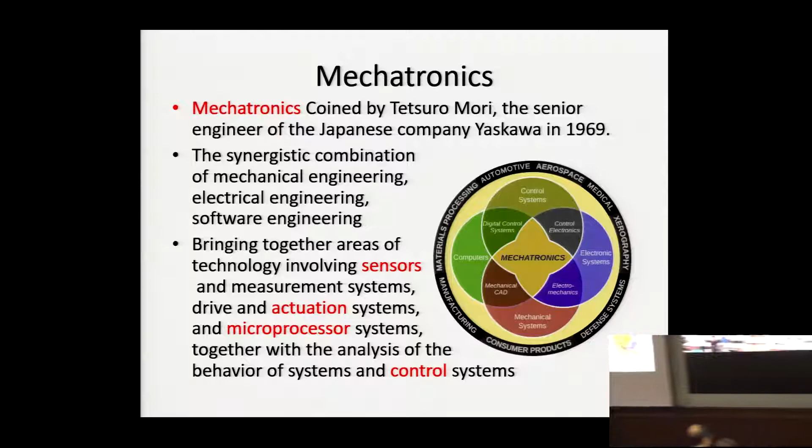And in order to make these two terms work properly, we need another technology, software, to combine these two systems together. So we bring together the areas of technology involving sensors, actuators, and also the microprocessor, together, to analyze the behavior of the mechanical and electrical system. And not only to analyze, but also to control the behavior of the system to meet our requirements. So that's the idea of mechatronics.

So if you look at the figure here, this is mechatronics. It involves the mechanical system and electronic system, and you are going to use computing power, computing technology, to control the system. So this is the main idea of mechatronics. And this can apply to the automotive sector, aerospace, medical, xerography and defense systems, consumer products, manufacturing, and material processing. So we can use mechatronic technology to apply in these areas. I think these days we have to also include agriculture as well.

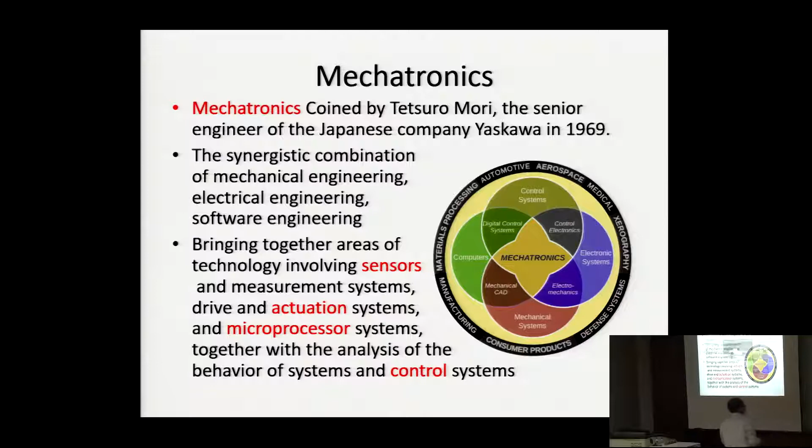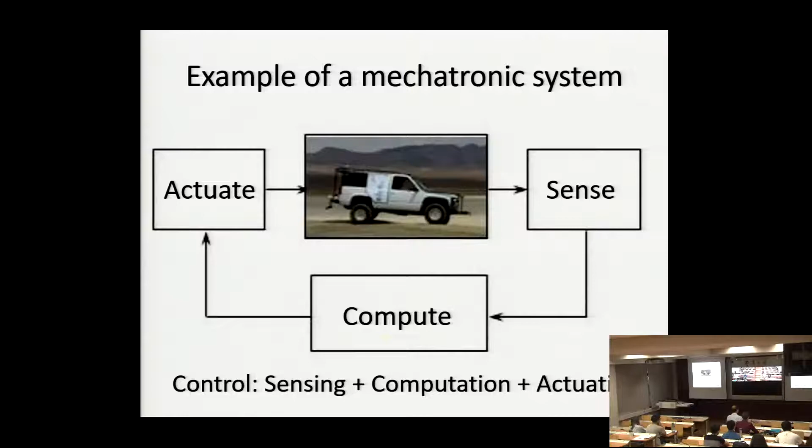I just give you an example of a mechatronic system. So this is the vehicle, and if you want to control the speed of the vehicle, you can look at this object. It is a mechanical system, but it involves a lot of electronics and also a computer inside the vehicle. We want to control the speed of the vehicle, so we need a sensor, and we also need to compute the error between the desired speed and the actual speed, and output the control signal to the actuators, so that the vehicle can perform the desired behavior we wanted. So this is an example of a mechatronic system.

If we look at more detail, this is the vehicle. When it moves, the speed will be sensed, measured by a sensor, and sent to the computer for computation. Then the signal is sent to the throttle for the engine to accelerate or decelerate, so that the speed of the vehicle will follow the speed we set. So this is the kind of workflow for a mechatronic system.

And in this structure, we call it feedback. The term feedback is used because the speed of the vehicle will be measured and sent to the computer, so that we know what's going on with the vehicle. This is the sense of feedback, the core idea of feedback: the speed will be measured and also monitored by the computer so that we can take some actions. In this feedback structure, an accurate speed can be achieved.

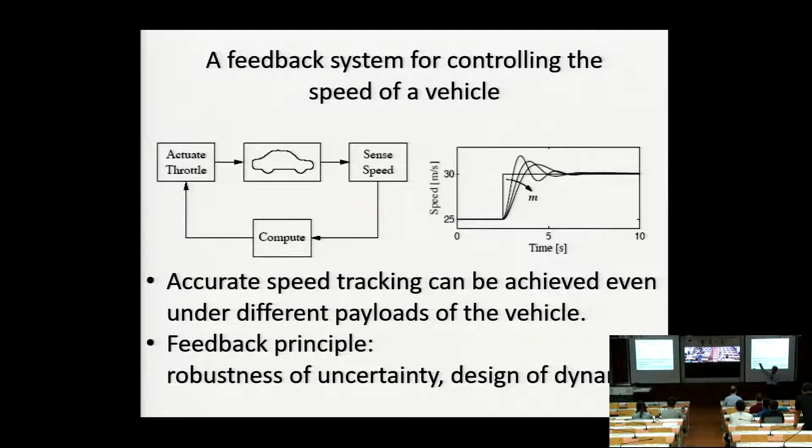Not only in an ideal case, but even under different conditions of the vehicle. For example, if the vehicle is going uphill or downhill, gravity will automatically change the speed of the vehicle. But because there's a feedback, a sensor, and a computer, we can adjust the throttle of the engine in order to maintain a constant speed.

Okay, so that's the concept. Even under different payload conditions of the vehicle, we still can accurately track speed. So using the feedback, we can have two properties. One is robustness to uncertainty. No matter how many people are in the vehicle, uphill, downhill, all kinds of uncertainty, you still can maintain a constant speed for the vehicle. This is the concept of robustness.

Another thing is we can use the feedback to design the dynamics. That means we can use control technology to change the dynamics of the vehicle. For example, if the system response time is too slow and you're not satisfied with the moving speed, you can use the feedback to accelerate. We call it changing the rising time of the response.

This is when you look at some machines, they are moving very slowly. But if you put some sensors and a motor, you can use control technology to increase the positioning performance of the machine. That's what we call the design of the dynamics.

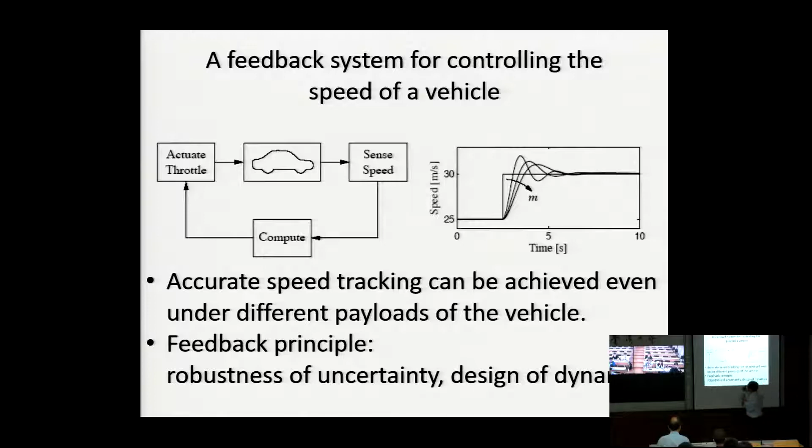And also the overshoot—for example, for luxury cars like BMW, they have actuators on their damping systems. So in different road conditions, they can change the damping factors so that the acceleration after a bump will be very comfortable for the human. That's what we call the overshoot.

So with a feedback system, you can change the response time, you can change the accuracy, you also can change the overshoot, the vibration and acceleration behavior, so that you can use that to design the dynamics of this object. That's some idea for a Mechatronics system.

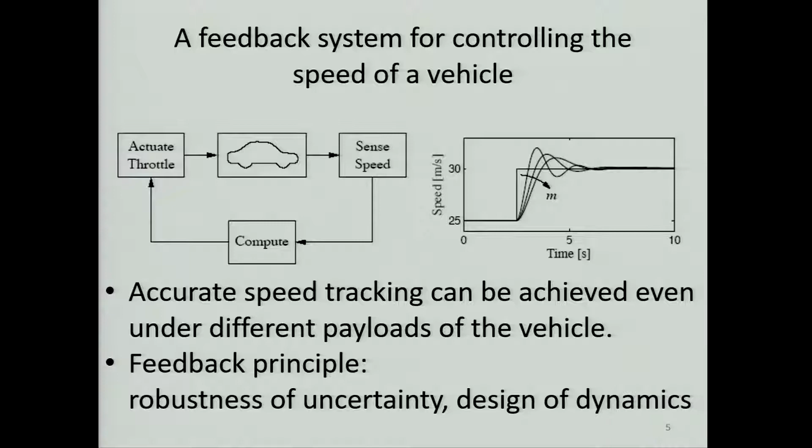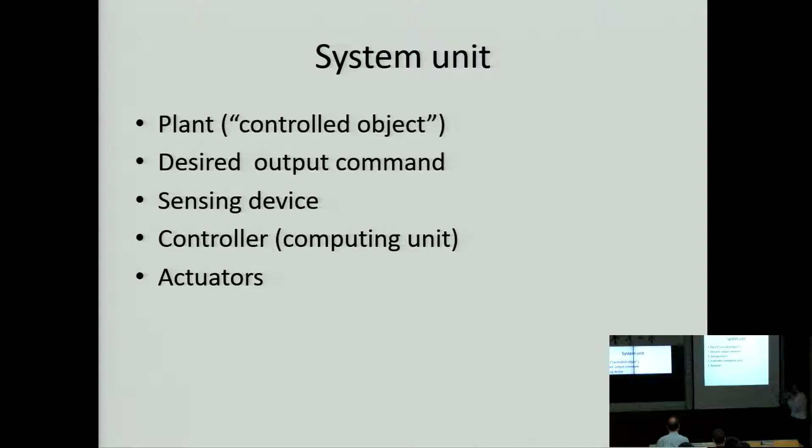So we look at this Mechatronics system, two sides. We have the control object, for example the vehicle, and there's a terminology we call the plant. And then we assign a desired output command to the plant—say, this is our desire, our command.

Then we measure the actual output of the control object. So we have the sensors, and then we have the computers to compute the control signals, and we send the computed signal to the actuators. So these are the 5 elements for a Mechatronics system.

If I speak too fast, please let me know. Later on, we are going to introduce these elements in more detail.

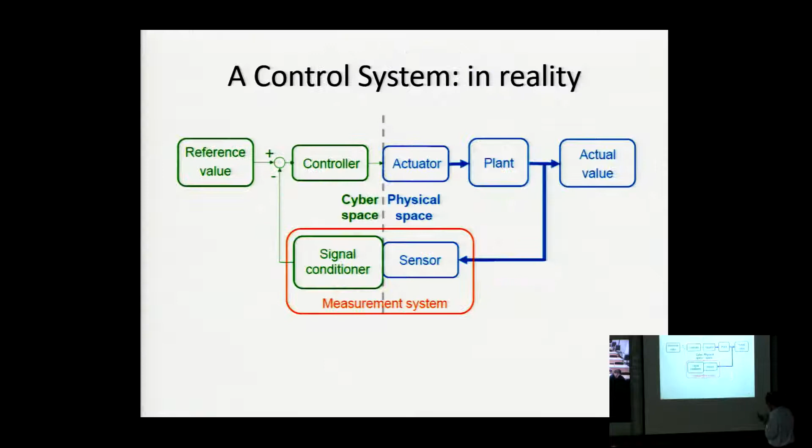As you remember, we need to analyze the behavior of the system. You have to transform a control system in reality into a model, in transfer function. So this mechatronic system will be looked at again, but in mathematics. We need a transfer function to represent the dynamics of the plant, the sensor, and also the controller, so that the overall dynamics will meet your specifications, such as response time, accuracy, and overshoot. This is one of the important procedures when designing a mechatronic system.

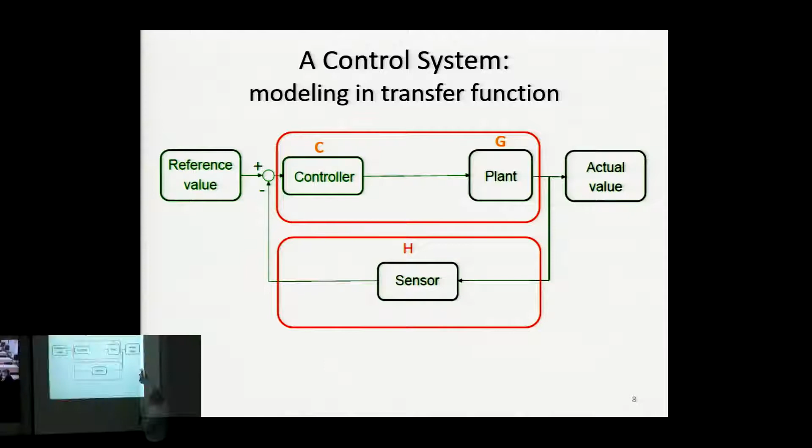In our agriculture field, this is also one of the booming technologies, using this kind of technology for agriculture, harvesting, and many other applications.

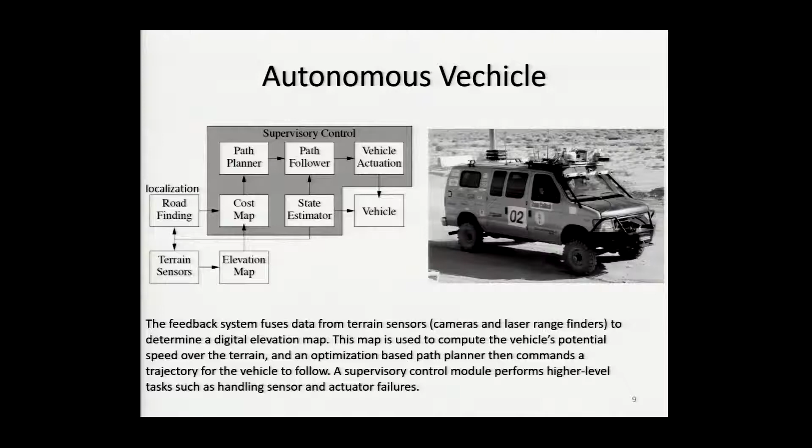From now on, I'm going to introduce each element in this mechatronic system. If you're familiar with it, this is a review; if not, it's the first time you'll get some basic concepts of what's going on in a mechatronic system. First, I'll introduce the sensor, the sensing technology. The sensor may measure physical properties like position, velocity, and acceleration.

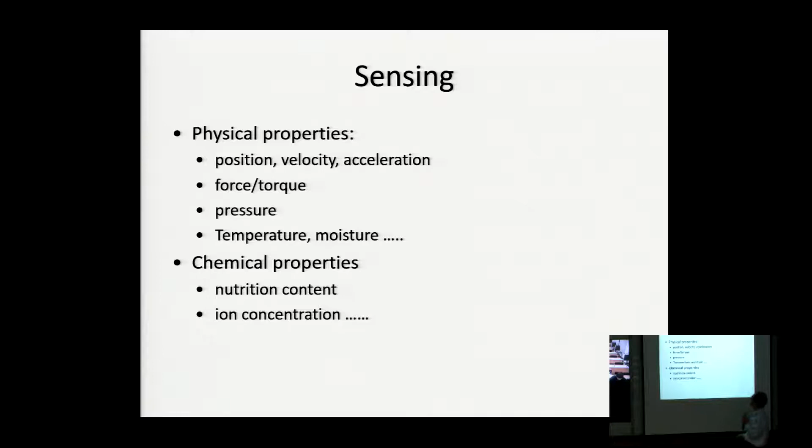The sensor can also measure some force, torque, pressure, temperature, moisture. It can also be used to measure chemical properties such as nutrition contents, ion concentration, and many others, depending on what kind of properties you are interested in. You can find a proper sensor or develop proper sensors for your application.

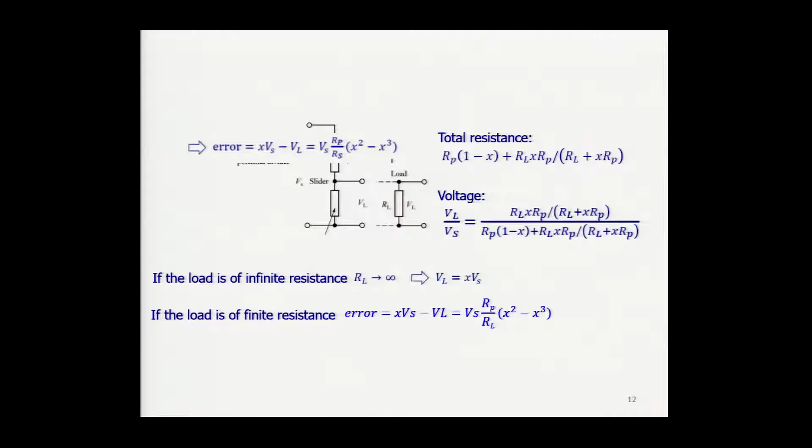And as we see, we have to model this in mathematics. This is one of the very important concepts. When you construct your mechatronic system, always think about whether you can build a model for such a system, because with the mathematics we can start to analyze the behavior of the system. As mentioned in the previous slide, this is crucial for designing your mechatronic system. You should be able to analyze that.

So this is the sensor, the potentiometer, and you connect the output voltage to your device. There's a load effect: if your device's input impedance is infinity, then the relationship between voltage and position is very simple. For example, this is the power supply, which we call Vs. We just calculate the proportion, the ratio of the output voltage to the power supply, and we can know the position, the displacement—this is proportional. For example, if this is 50% of the voltage, then you know the position is in the middle.

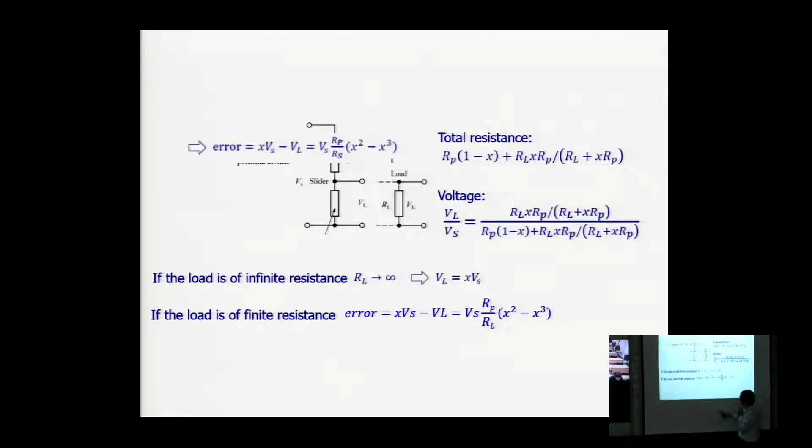That's very important—we call this an analog sensor, because the output is an analog signal, a voltage. And as an analog sensor, it's fragile; it's very sensitive to noise and the environment. In our environment, there are many interferences.

Another type is called the absolute encoder. They will not give you the angular displacement; instead they give you the absolute angle of the shaft relative to the initial position. That's why it's called absolute.

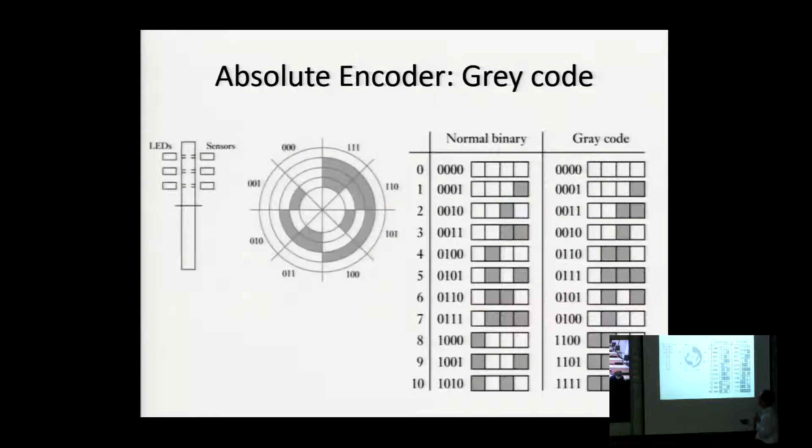It can be made very cheap if the accuracy is not so high. Another type is called the absolute encoder. That's different, it's more expensive. You need more LEDs and sensors to measure that. So, for example, this resolution is 10. Then you have lots of slots, and they are designed very differently from the incremental encoder.

So this is what we call the gray code. The gray code. So they just detect the gray code, and they will know the shaft is in this area or that area. By increasing the resolution, you will be able to measure a very small angle. Okay, let's go gray code.

That's a very brief introduction of how to measure angular or linear displacement. The other thing is to measure the angular velocity, called a gyroscope.

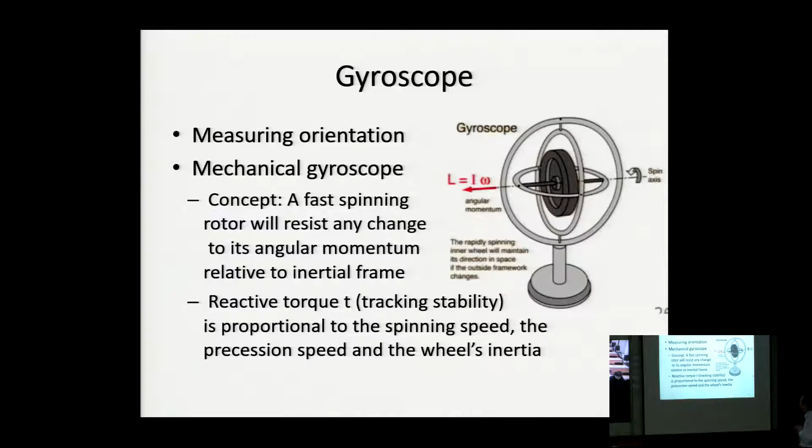In more detail, you have to go to the reference to see what is going on. Okay, that's the basic idea.

We also can use MEMS technology to measure acceleration, called the accelerometer. They use the basic idea of a second order mechanical system, with a mass and a spring. So you measure the pattern, and you will be able to measure the acceleration. This is the basic idea, the standard second order system. So you will be able to measure the external acceleration, and they can make it very small. This is the accelerometer.

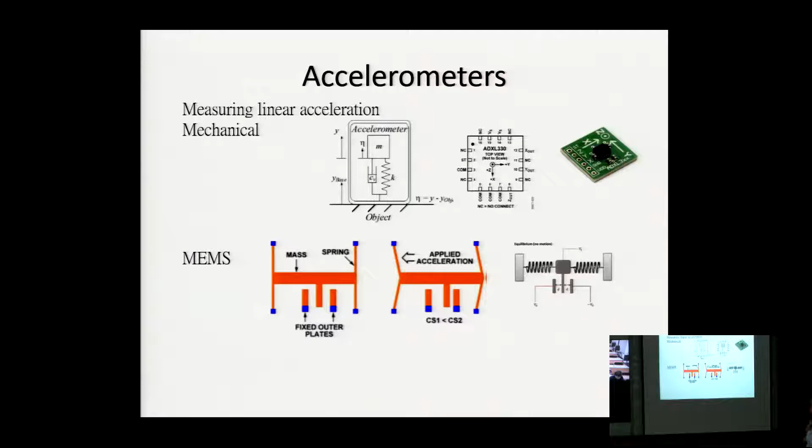And we also can use the magnetic field on Earth to measure the absolute orientation as well. This is mechanical, also using MEMS technology to measure the angle. They're called compass. I think I don't need to talk about compass - when you go hiking, in ancient times, you have the compass to know where you are, right?

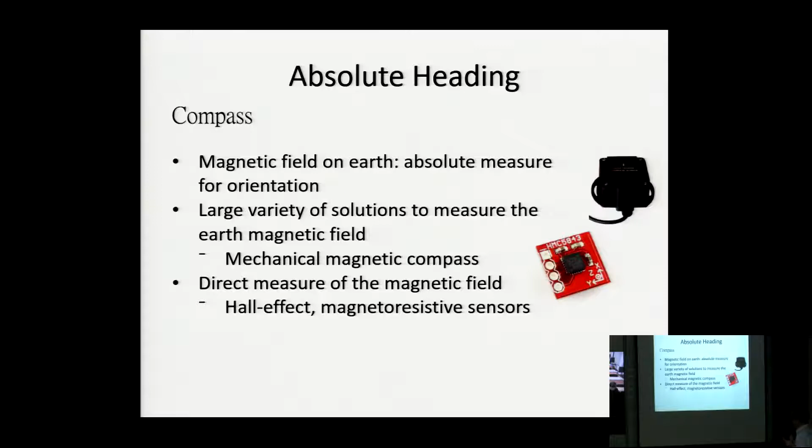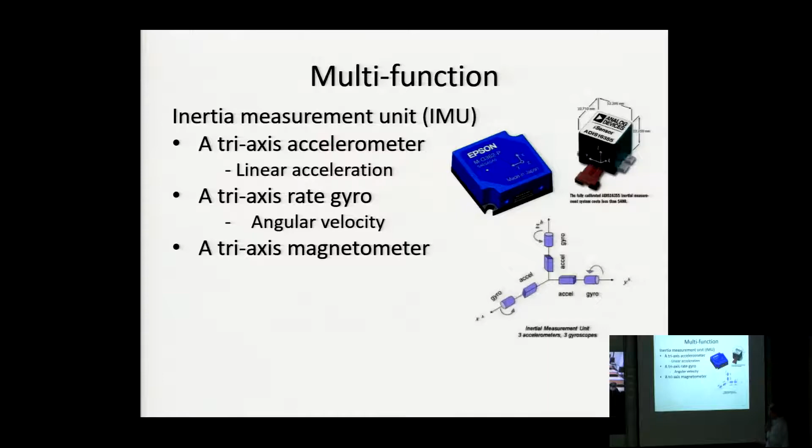The nose, the direction of the nose, that's the idea of the compass. So these days, they combine accelerometer, the rate gyro, and the magnetometers together to provide a unified output. They call it the IMU. At the same time, you can know the acceleration, the velocity, angular velocity, also the orientation relative to the Earth. This just provides you raw data. You need to process the measurement by your algorithms. We call it data fusion. Then you can output the actual position of the vehicle and also the orientation by your algorithm. Okay, right now, this is IMU.

And we also have another sensor to measure the position of your objects. Here in Taiwan, we are using a system called GPS, provided by the US. This system was developed originally for military use, for missile guidance. And nowadays, it's accessible for commercial applications.

And in the system, there are 33 satellites at a height of about 20,000 kilometers, orbiting every 12 hours. Because there are 33 satellites, at the same time your area is probably covered by at least 4 satellites. So you can use these signals provided by 4 satellites and calculate where you are, the position. Of course, more satellites will improve the accuracy of the GPS.

In Europe, you have another system - do you know the name? Japan has their own, and China, Russia too. Every country prefers to have their own satellite system. So that's the GPS, the global positioning system.

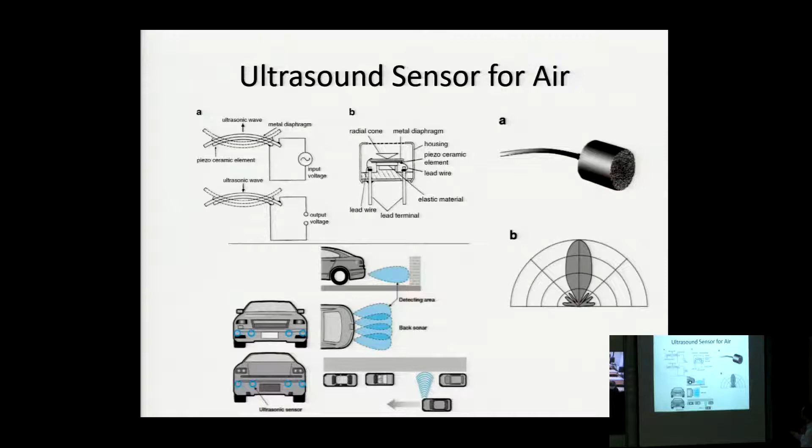So with ultrasound, you send a voltage to the piezoelectric elements - these are the driving signals. They generate a mechanical wave, send it out, and you wait until the echo, measuring the time - we call it the falling edge. You calculate the time duration t, and multiply by the speed of sound, then divide by 2, because the wave goes out and comes back. Dividing by 2 allows you to measure the distance between the obstacle and your object.

But you also have to be aware the speed of sound depends on the medium. For example, if you use ultrasound on the human body, you have to know the speed of sound in your tissue - it's different from in the air, and that will generate a more accurate output.

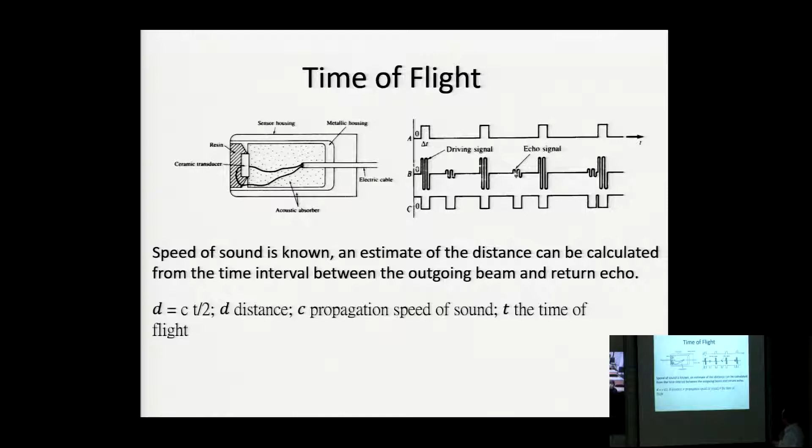But you also have to know that when using ultrasound to detect distance, you must be very aware of the artifacts of ultrasound. For example, if the object is not located in the direction of your mechanical wave, it will create what we call a virtual object. Here, there's a wall with a very smooth surface, so the mechanical wave will reflect at an angle, touch the object, and reflect again. But because you're not aware of this, you'll think the object is in your direction. If you use this distance to move your vehicle, it will collide with the wall. This is called the artifact.

In order to solve this problem, you need more sensors. That's why we usually use many ultrasound sensors - we call it an ultrasound array. Ultrasound is relatively cheap, so you can do that.

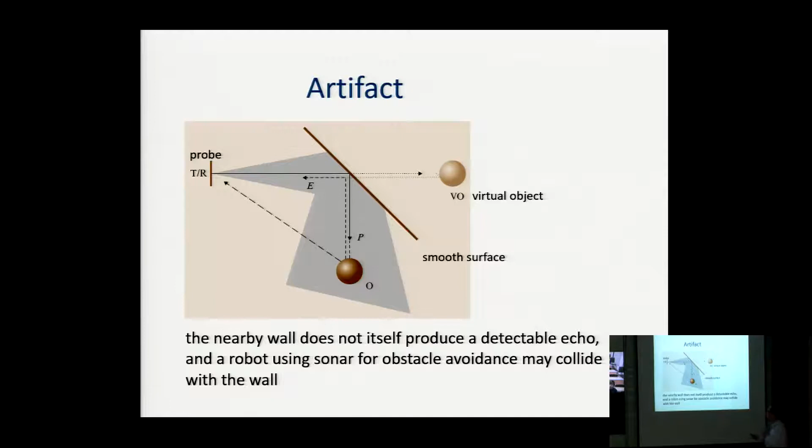And to measure the distance, you can use the ultrasound. You can use another one called radar.

Especially in these days for defense. So this airplane, you have the radar. Radar is a radiant - they are sending out the radio frequency, RF signals.

The radar is moving, rotating, so it detects everywhere. They're sending the signal out, and then they are also waiting for the reflected signals, because in the air there are always lots of reflected RF signals. If you have a sensor, you always have RF signals coming into your sensor.

So they have algorithms here. What they are doing is setting a special modulator. For example, I have a radar here, and I don't want our enemy to know I have a radar. But from the enemy's point of view, they are always trying to figure out, is the radar detecting me? Try to hide myself, right? So you have to modulate your signal, sending it out like noise, so nobody knows if it's noise or a signal sent from the radar.

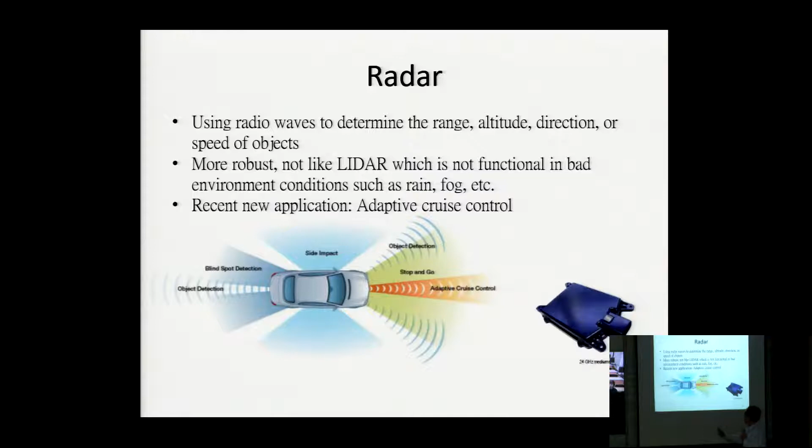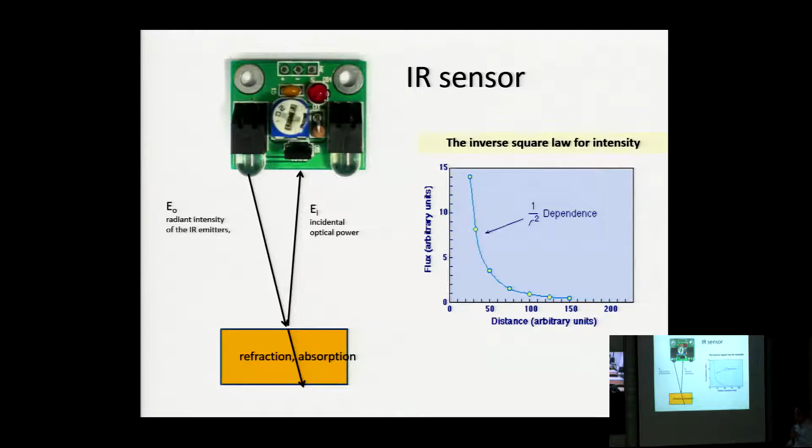And you look at the IR sensor, there are two. Why? Probably you'd say one is enough. If you have more emitters, LEDs, in your IR, you can actually control the direction of your IR light to any direction, using what we call beam forming, using a time sequence.

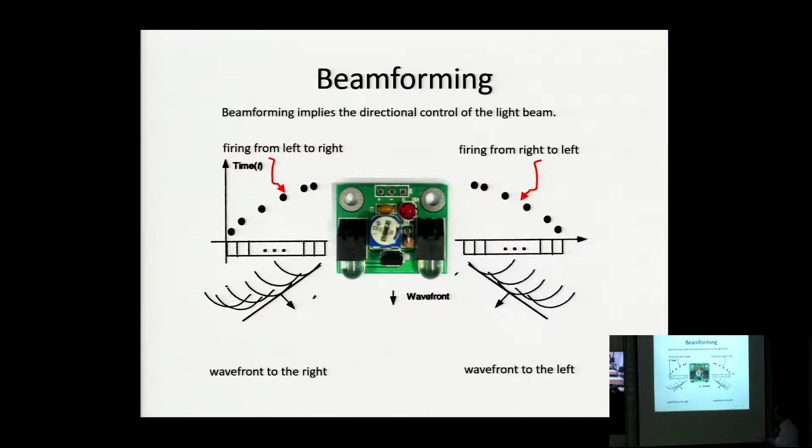So that's the working principle for IR. Very cheap sensor, usually used for line tracking. But these days students more often use the vision sensor. Still, it's very effective for line tracking.

And if you're interested in more accurate position, you can also use what we call the position sensitive detector. They use the same working principle as IR sensing, but in a more complicated way, with better resolution. The working principle is the same, and they make it linear through calibration techniques.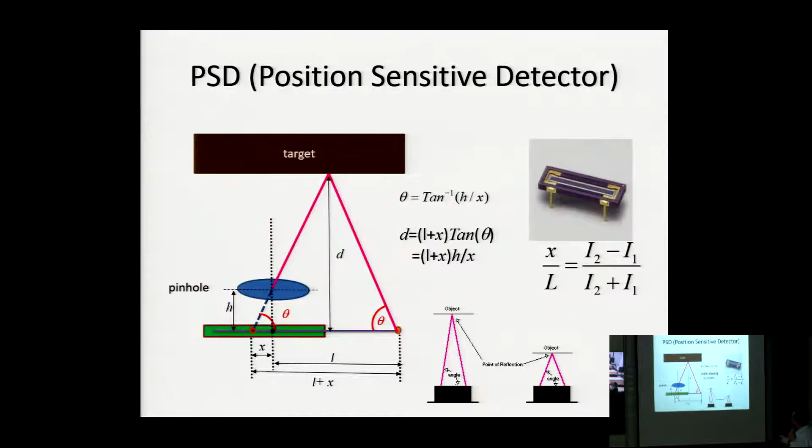Okay, that's one case. I'm going to introduce a lot of sensors because this is very important for you to make an electronic system. This is the laser rangefinder - it's only one direction. They send out the laser light, detect the reflected light, and calculate the phase shift.

You cannot measure the time of flight because the speed of light is very, very fast - measuring that is impossible. So one thing you can measure is the phase, because a laser is an electromagnetic signal that has a frequency. By measuring the phase, you're able to calculate the distance. That's for one direction.

These days there are two directions - they rotate the laser rangefinder so they can measure the environment in 360 degrees, creating a point cloud. And if they angle it up and down, they can generate a 3D point cloud of your environment. That's called LiDAR.

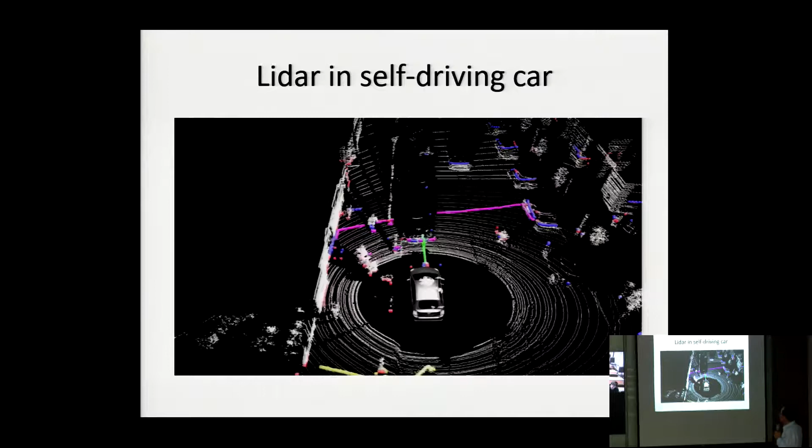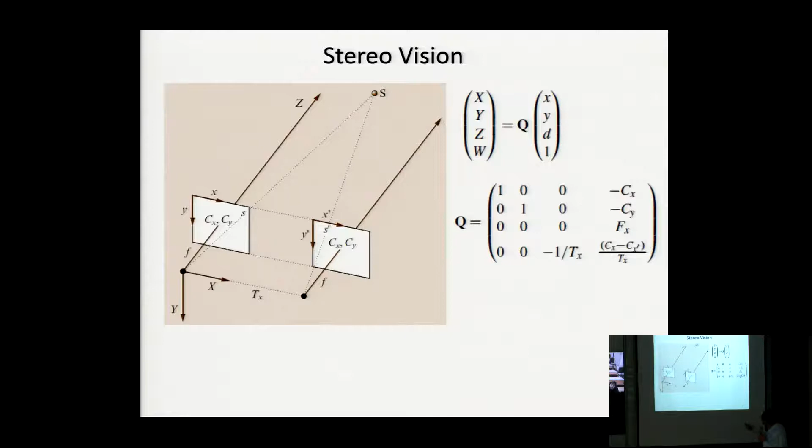And this is the last one, also very important - the vision, stereo vision sensor. They use two cameras to take images. If you have the model, you'll be able to calculate the object's location from these two images based on your model. I'm not going to explain in detail how it works, but I want to point out that when you use stereo vision, you have to know its limitation.

It's called disparity. For example, if you have two eyes - left and right - and you close one eye and go to an area, you won't get a very accurate estimation of the depth of the object. But with two eyes, the image on the left-hand side and the right-hand side are not completely the same - they have a little difference. We call this disparity, and using this disparity with a model, we can calculate the depth of the objects. That's the working principle.

But if we look at the stereo vision system... well, this is very, very complicated. We simplify these two nonlinear matrices. We can see from these equations that they are inversely proportional to each other. We calculate the sensitivity of these equations, and we find that the sensitivity of depth is the inverse of disparity squared.

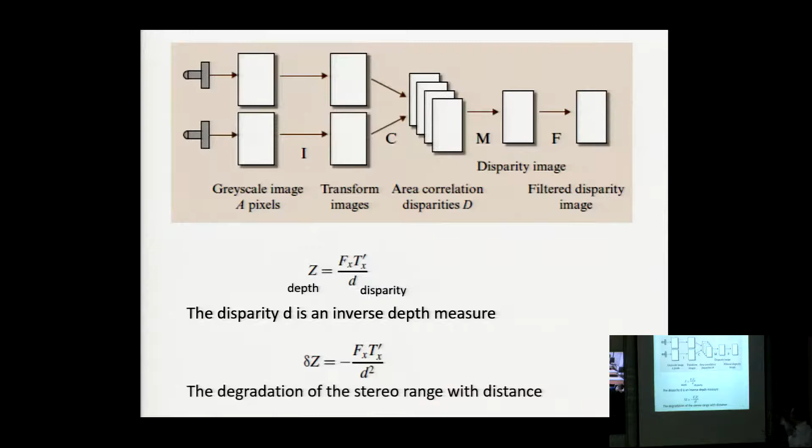And if this sensor can be very, very long distance from each other, they make the resolution much better. This is a physical property of that, okay, so you know that.

So in order to do that, you have to analyze your stereo vision system to think about your disparity and make your model in the area you are really interested in, right? So that you can make your stereo vision system more accurate. That's one thing you have to bear in mind when you are using a stereo vision for the distance measurement.

Oh, we are running out of time. So originally, I was planning to have a short break, but I think I had better continue my presentation.

So let's give you a lot of introduction, many different sensors. I think it's quite important when you are making a mechatronic system for agricultural application.

And then we look at the actuators. I'm going to make it short. So here, there are 4 types of motors, probably quite frequently used in industry. One is a DC motor, DC brush - there's a brush here, this DC brush motor. And also one of the very important, we call the brushless DC motor, especially for the vehicle, electric car, and stepping motor. And in industry, we need a large torque and energy efficiency, so because their power is mostly in AC, it's AC motor. So 4 types of motors.

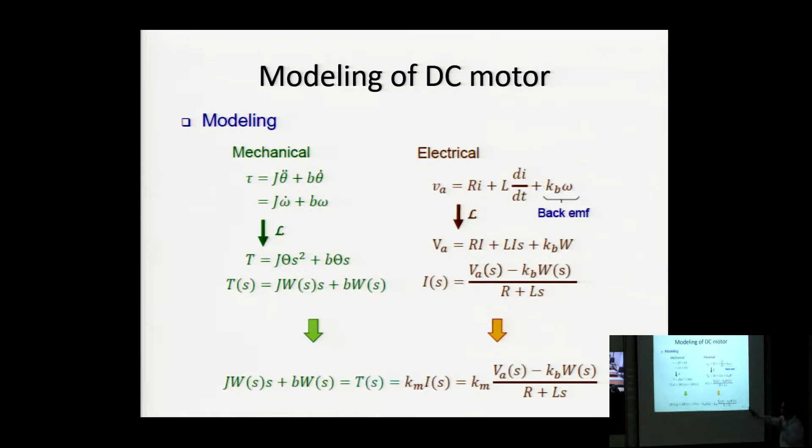You have a motor constant, you have a KB here, back EMF is also another very important factor. And then the armature resistance, inductance, and also have the moment inertia of your shaft and the bearing friction. These parameters will strongly influence the dynamics of your motor, as I mentioned.

But you can use control to design the dynamics of your motor, as I mentioned. So in these days, they have a controller we call driver. For the motor, we call it servo motor. The purpose of the servo motor is to design the dynamics of the motor to meet the requirement by the users, right? So this is only the motor.

If you combine with a sensor, like an encoder we just mentioned, the computer, and also the power electronics, then you can make your DC motor as a servo motor. And then you can improve the response time, the accuracy, and also the overshoot. So that's the basic.

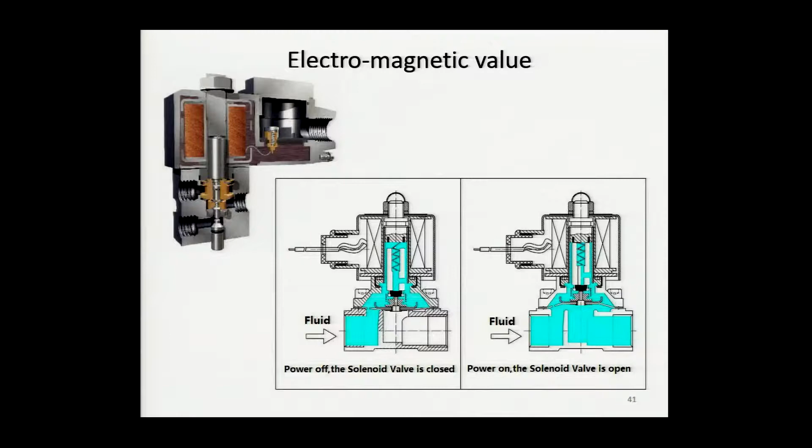So, sensors, actuators. What about the controller? Here, I just give you a very short introduction of the controller.

For example, students making the robot move from A to B. They calculate the distance is positive, so they move the vehicle towards the goal. When they reach the goal and overshoot it, they turn it back. So if using on-off control, the vehicle is moving back and forward, like oscillation. On-off control will produce very significant oscillation when you reach the area of the goal.

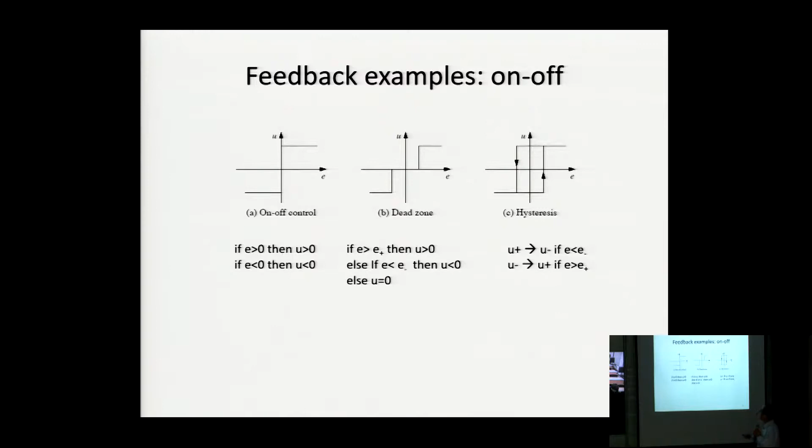There is also another on-off control, but in a more sophisticated way. If the load is a little bit up or down, then you probably need to make your program more complicated, depending on the direction — hysteresis control. All these are categorized as on-off control. You don't need to know any model of your control object, the plant. Depending on the current sensing information, you decide the output. I think it's not good enough, the performance is not good enough.

So another is using what we call PID. You can see the control signal is continuous signals. It's more sophisticated, based on the error to determine the output. So error is larger, then the control signal is larger. So you can see the car, when away from your goal, is moving faster, but then as it reaches the goal, they slow down the speed. Finally they will stop at the goal. That's the idea of proportional feedback control.

But unfortunately, many systems, if you use only proportional control, they will oscillate, but eventually they will slow down. As we see, using proportional control, you can improve the response time, because if you are using on-off, you're moving at constant speed. But if you are using proportional control, when they are very far from each other, they move very fast and then slow down. So ideally that will improve the response time, make your system react more quickly. But unfortunately, some systems will overshoot a little bit, because if you increase the gain, it's going to overshoot.

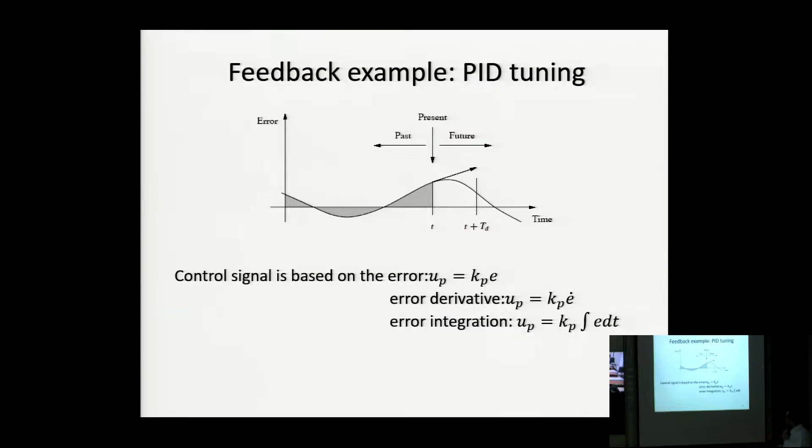So why do we need a model-based controller? Why do we need to learn a lot of theory to build a model for controller design? Why can't we just use PID? I'll give you an example.

In the next 10 minutes, this is the autonomous vehicle in an orchard developed by Carnegie Mellon University for localization and control, from this journal, Computers and Electronics in Agriculture. This is the autonomous vehicle in the orchard. Here you can see the LiDAR, as we mentioned. In this paper, they use LiDAR to measure distance and for localization and distance from landmarks.

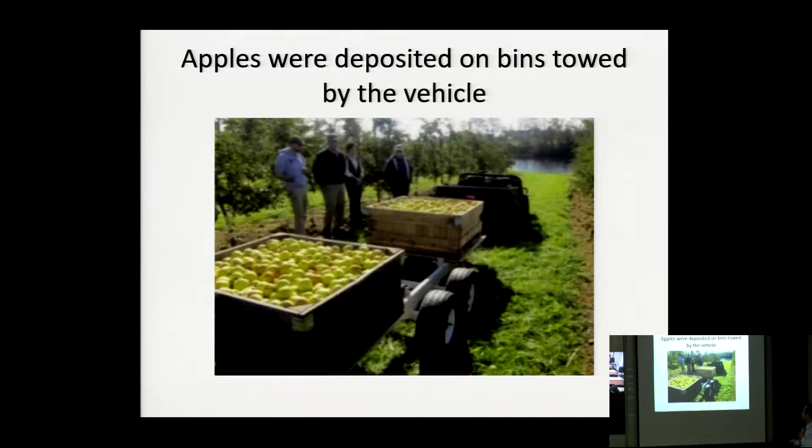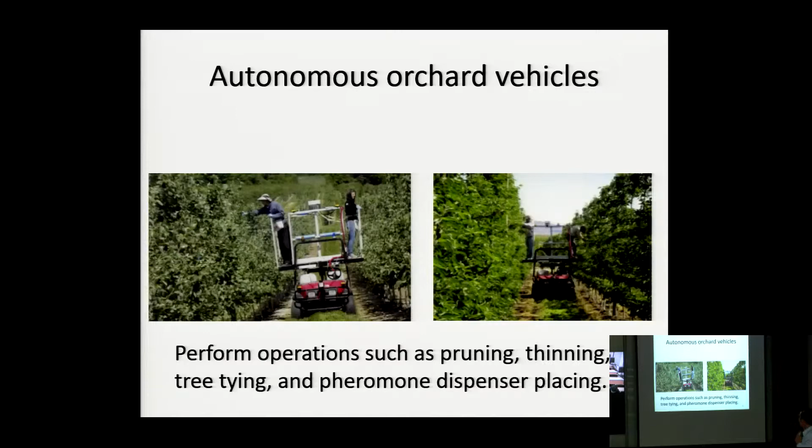They have many applications - they can do harvesting, pruning, thinning, and many other applications. So they need a model. What kind of model? They built a kinematic model for the autonomous vehicle. They are not going to control the dynamics of the car, just the kinematics. So it's not very complicated, but it will improve the overall performance, as we will see in the results. So this is the car.

I think this is rear wheel drive, but there's a steering wheel here. This is the steering angle, all right? And they model this as a bicycle model. The rear wheel provides the speed, and the steering wheel provides the steering angle. So there are two parameters - this is the speed of the vehicle. First of all, you have to find physical variables to describe the behavior of the system.

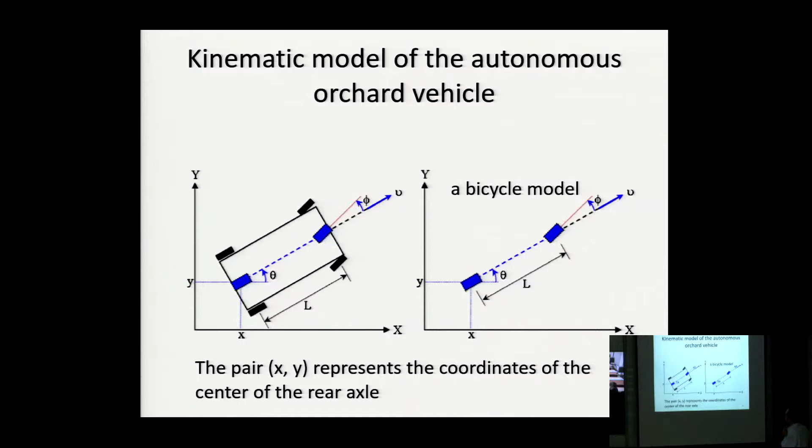So this is how they use mathematics to describe the behavior of the system. Finally, they derive the equations for the kinematics of the vehicle. I'm not going to explain the equations - that's not the purpose right now.

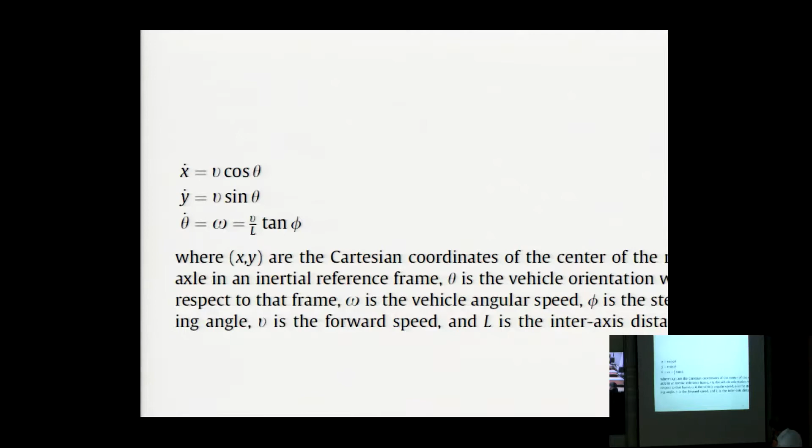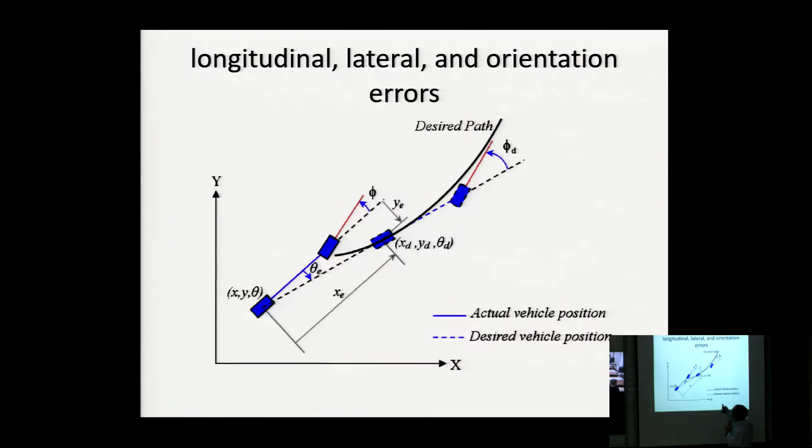So with this model, if your desired path - as in path planning - requires your vehicle to move along this curve, that's the path planning. Then how does your controller have to act for that purpose? It depends on the measurement - the sensing, the LiDAR, the measurement.

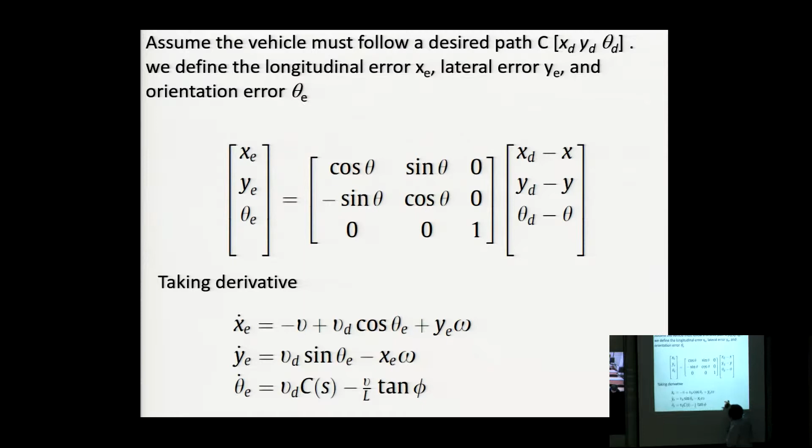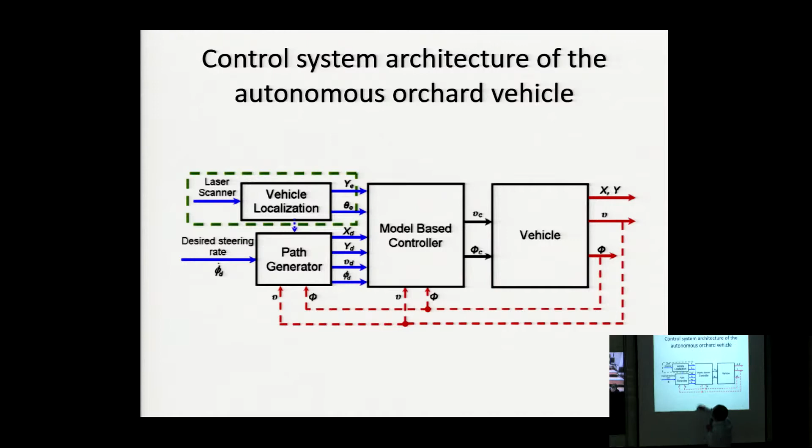So we call this a model-based controller because you already have the model. You calculate the rear wheel speed and the steering angle - these are the control signals. Based on the sensing, you have a sensor, the laser rangefinder, and you also generate the path. This is the model you calculate, and then you can do that.

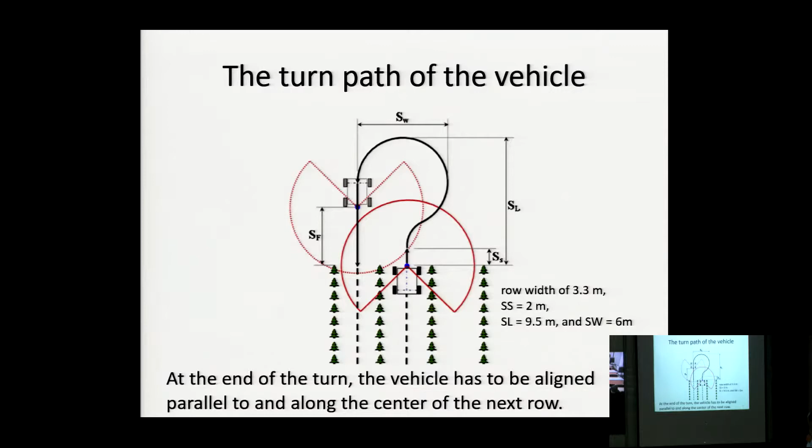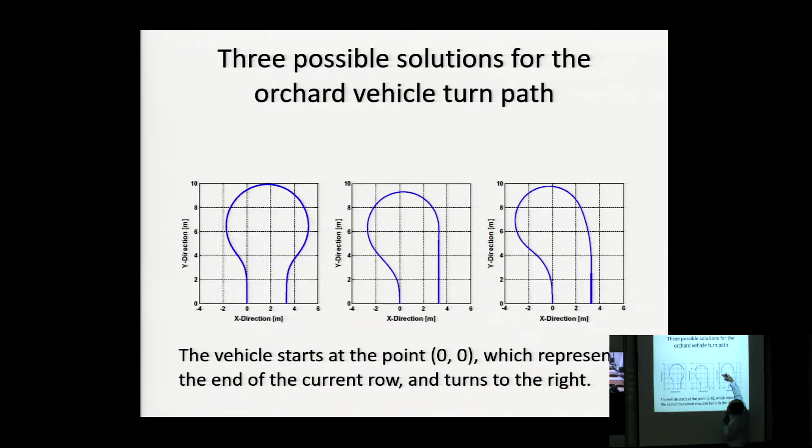So we will see the video - they are doing this based on the model. They have many different schemes for how to turn the vehicle in the opposite direction. They also do path planning - this is what we call path planning, and this is trajectory planning. This is the path, and at each point, what speed it's going to be.

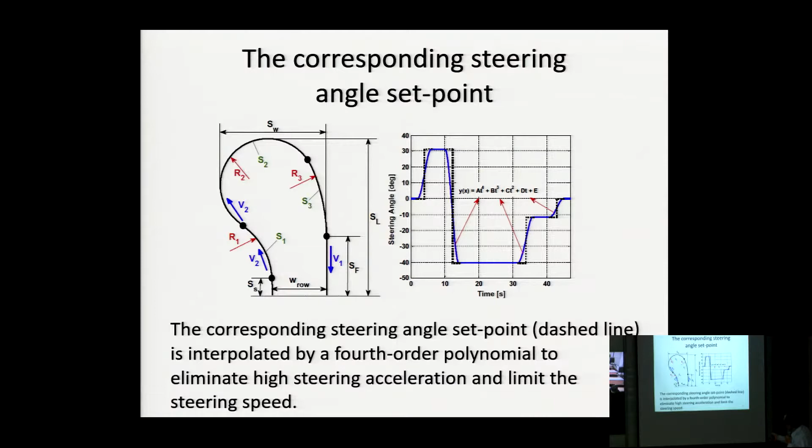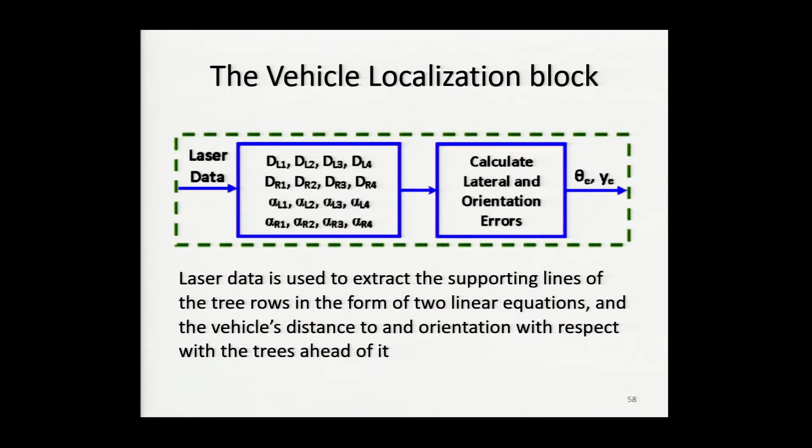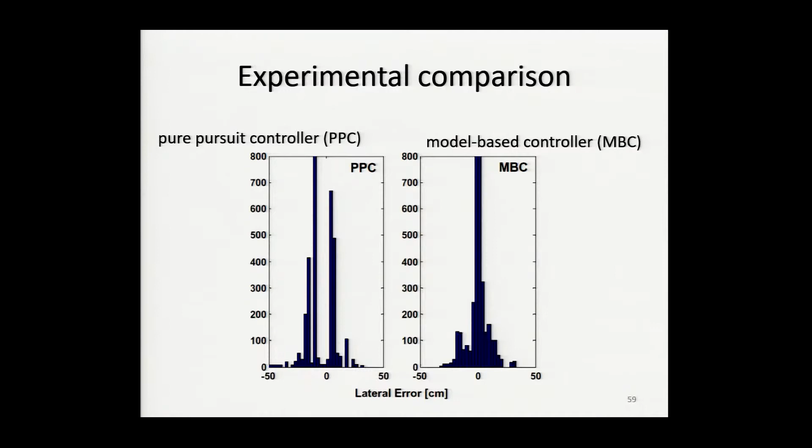This is the localization, how they calculate the position. This is the performance - this is the model-based controller. You can see that if you're not using the model, it's less concentrated around zero error in the center. That means the average error for the model-based controller is much better than without the model. The blue line indicates that your vehicle will follow the planned path, staying on the right track to do the job, something like that.

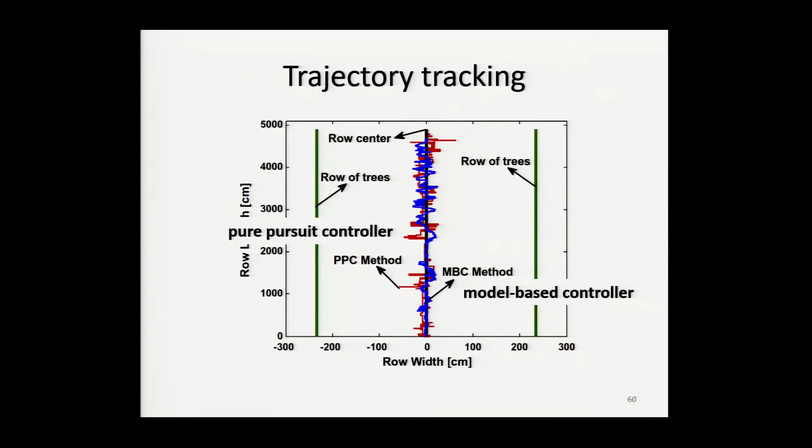Let me show you the video, and then we can discuss. That will be today's video. This is even more complicated because there's a trailer involved.

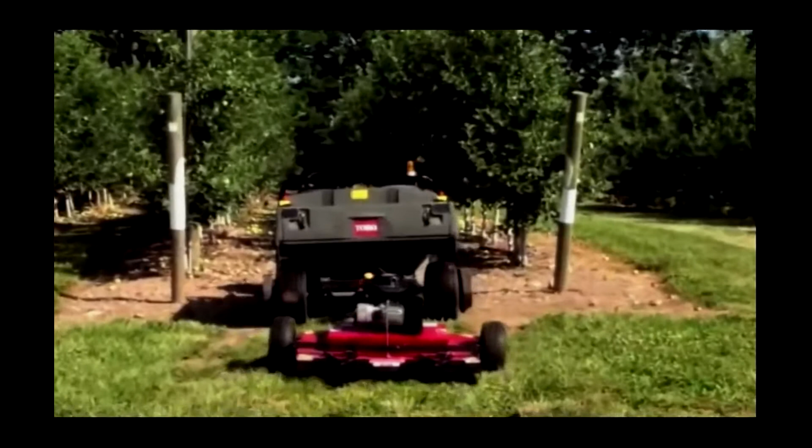This is not easy, right? I think my students will know, because there's no marker at all in the turning area. When they enter into the row, they have a sensor input, that's fine, you can collect your position, but in the turning area, how can you do that? That's the challenge.

They are taking some images here. We'll just speed up.

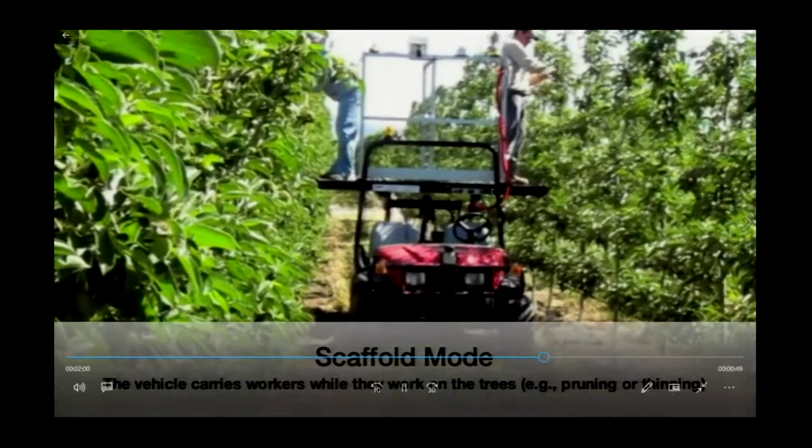So the vehicle is moving autonomously and cooperatively with the workers, so they will know how to move. There's no people driving the car, but they know when to move the car and when to stop it. Even when a human being is standing on the vehicle, it will know how to cooperate with that person. It cannot move too fast.

Okay, hopefully that's the thing. Yeah, that's the vehicle developed by CMU. I'll just show you the last video, I think it's from last year. It's the famous Blue River, acquired by Deere. So that's the commercial by Blue River.

This is also one of them. Okay, we're looking for other ways to combat the weeds and still have cost savings on top of everything. We saw an opportunity to take cameras, computers, and artificial intelligence to allow ag machines to see every plant in the field.

We thought we could give farmers the ultimate flexible tool to treat and manage their field in whatever way they wanted, by having knowledge of every plant and its situation, and the ability to spray very precisely, whether it be herbicide only to the weeds, or fertilizer or fungicide directly on each plant that needed it.

Each field they go to has a different set of conditions, and they need to be able to adjust and correctly set that machine's performance for the field.